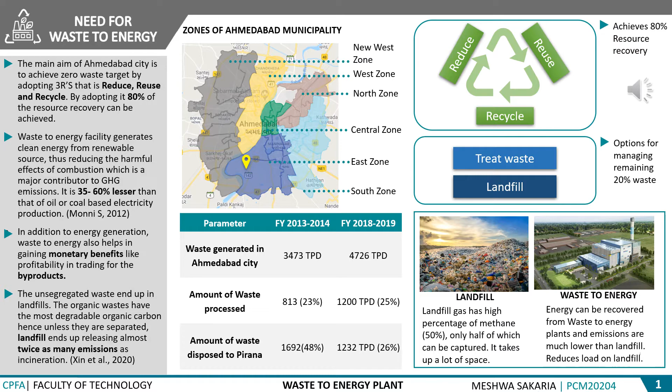So what is the need for a waste to energy plant? The main aim of Ahmedabad city is to achieve a zero waste target by adopting the 3 R's, that is reduce, reuse and recycle. By adopting it, 80% of the resource recovery can be achieved. For the remaining 20%, we are left with two options, that is treatment of waste or dumping the waste into landfills. A waste to energy project proves to be beneficial over landfill as it utilizes the municipal solid waste to process and produce energy in the form of electricity, heat or fuel, thus reducing the harmful effects of combustion.

So first is technical analysis. Technical analysis is the analysis of all the technical aspects of the project, which includes material inputs and utilities, plant capacity, layout and construction along with machineries and equipments. For technical analysis, the approach was: first technological identification was done, then technical analysis, types and equipments required, and site layout and details. So for this we considered four types of technologies.

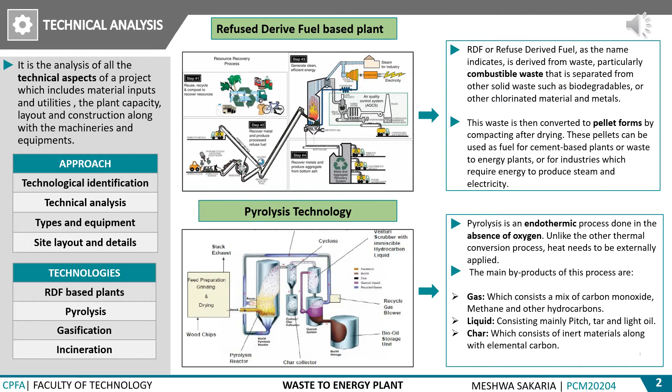First is RDF, that is refuse derived fuel. It is particularly combustible waste and is then converted to pellets which can be used as a fuel for a waste to energy plant to produce steam and electricity. Next is pyrolysis. It is an endothermic process done in the absence of oxygen and the main byproducts of this are gas, liquid and char. The table here represents the existing processing facilities in Ahmedabad.

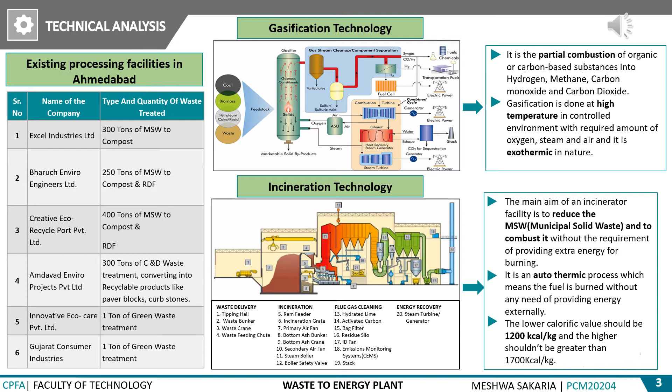Third type of technology is gasification. Gasification is the partial combustion of organic substances which is done at high temperatures and is exothermic in nature. And the last one is incineration. The main aim of an incinerator facility is to reduce the MSW mass and to combust it without the requirement of providing extra energy for burning.

So based upon the technological options mentioned above, the scoring model has been prepared considering three criteria. First is technical criteria. For the technological criteria, we considered parameters like land requirement, waste quantity which can be managed by a single facility, requirement for segregation prior to technology, rejects, the potential for direct energy recovery, and technology maturity. Second is financial criteria.

Under that, we considered capital investment and market for byproducts as parameters. Then the third is managerial criteria. In that, we considered labor requirement. So after considering all these criteria, incineration was getting the highest score, that is 173, and therefore it is the most suitable method for the waste to energy plant.

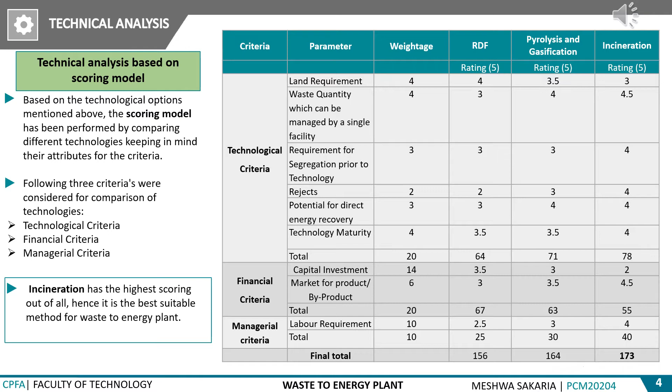Based upon the types of incinerators, a comparison was done in order to find the best alternative. Mainly incinerators are classified into the following types: rotary kiln incinerator, moving grate incinerator and fluidized bed incinerator. Here we have shown the table which consists of all the parameters. First is handling capacity, second is waste, third is temperature, fourth is pre-processing, and we have also taken into account the merits and demerits of all the types of incinerators.

So from this we can infer that for generating electricity, high calorific value waste is required, which is only possible in dry waste. The waste processing amount for the moving grate incinerator is more as compared with rotary kiln and fluidized bed incinerators, and the moving grate incinerator can handle variations in waste composition. So it is the best for our plant. Here we have also shown the site layout and details for the plant.

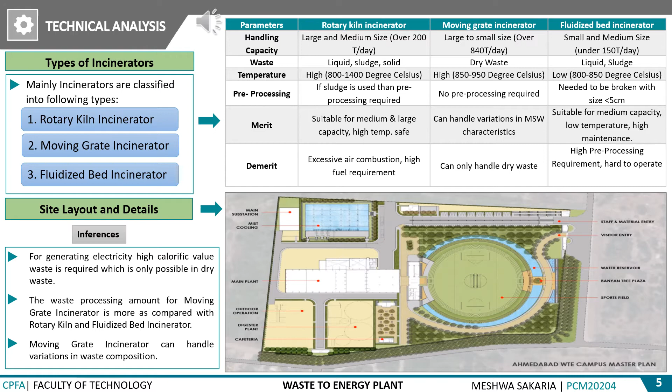Next is CBA, that is choosing by advantage. It is a lean tool in construction which helps in selecting one best suitable alternative among all the available alternatives. For this, discussion was carried out among client, designer, contractor and facility operator. So here we have considered two design problems.

First is CBA for roofing material. The factors for this are tensile strength, yield strength, thermal expansion, thermal resistance, fire resistance, solar reflectance index, lifespan, weight, hardness and sound absorption. So for all these factors, we defined the attributes, advantage and importance of advantage score to compare them.

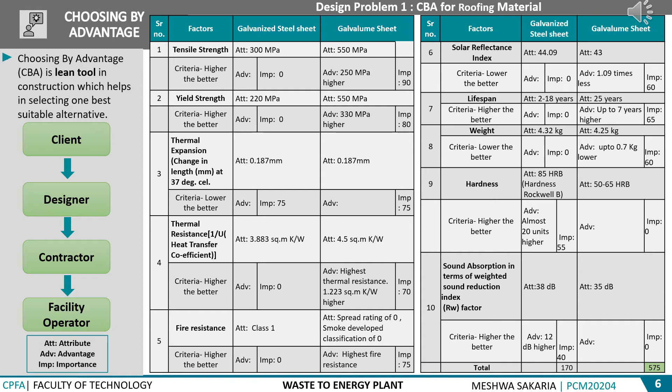After comparison we found that of the two materials which we selected, one was galvanized steel sheet and another was galvalume sheet. Galvalume sheet got the highest score, that is 575, and so it can be selected as a roofing material.

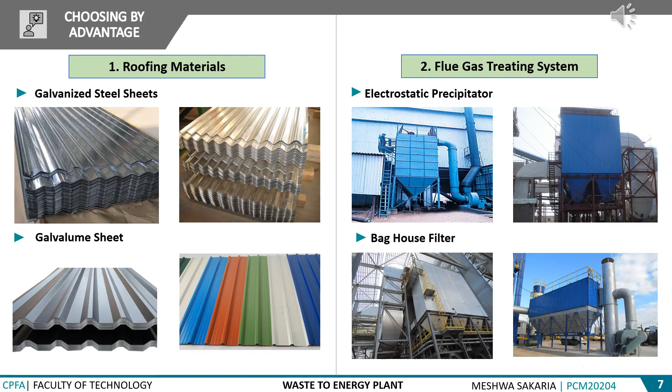The second design problem was the flue gas treating system, and the two alternatives which were selected for the same were electrostatic precipitators and baghouse filters. Here we have shown the pictures for the two different types of design problems.

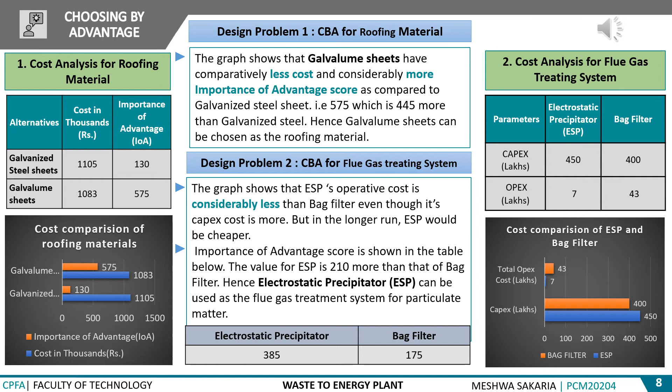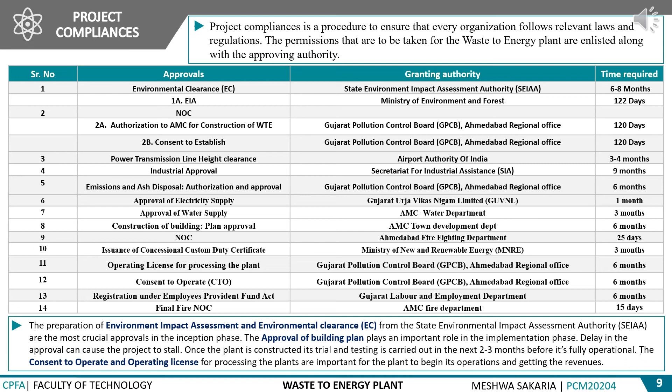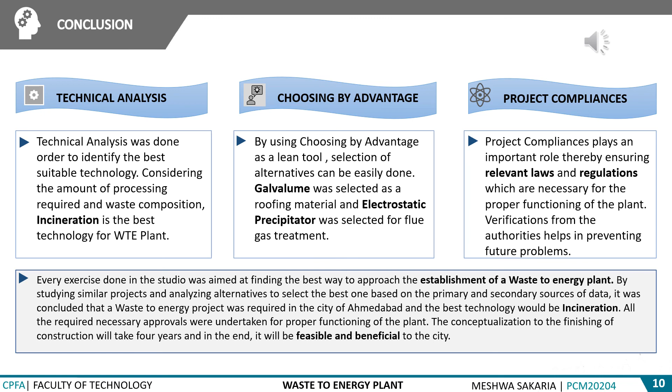So every exercise done in this studio was aimed at finding the best way to approach the establishment of a WTE plant by studying similar projects and analyzing alternatives to select the best one based upon primary and secondary sources of data. It was concluded that the waste to energy project was required in the city of Ahmedabad and the best technology would be incineration. All the necessary approvals were undertaken for proper functioning of the plant, and conceptualization to finishing of construction will take around 4 years. In the end, it was concluded that the project is feasible and it will be beneficial to the city.